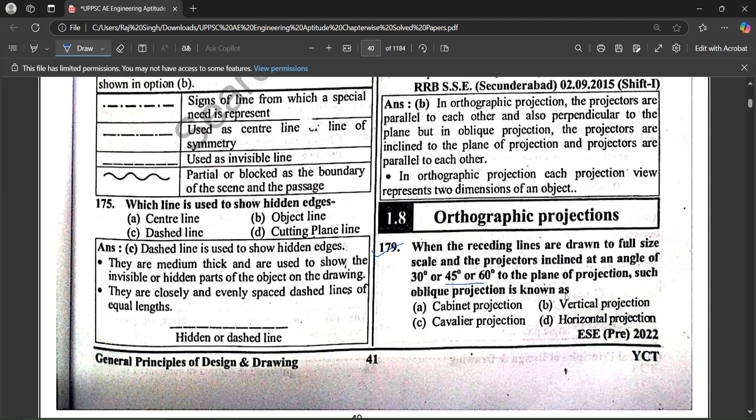There are three axes: vertical, horizontal, and oblique. The oblique axis, called receding axis, is drawn either at 30 degree or 45 degree or 60 degree. Types of oblique drawing: first is cavalier projection. When an oblique drawing is prepared to the exact dimension of an object, it is called cavalier projection. And in cabinet projection, to reduce distortion, the dimension of receding line of an object can be drawn at half scale.

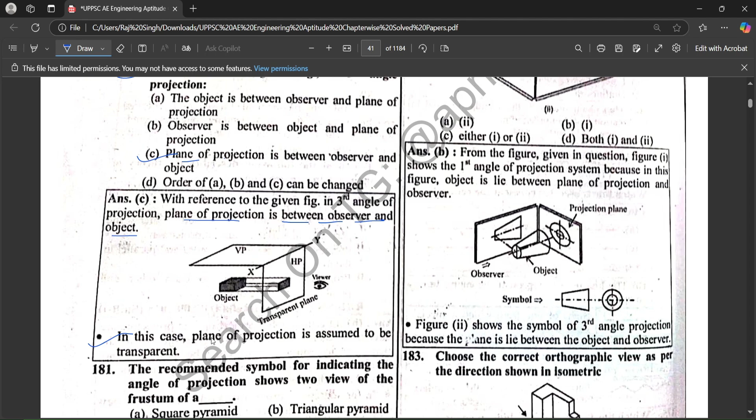Let's move ahead. With reference to figure in third angle projection, what happens? Plane of projection is between observer and object. With reference to the given figure in third angle of projection, plane of projection is between observer and object. In this case, plane of projection is assumed to be transparent.

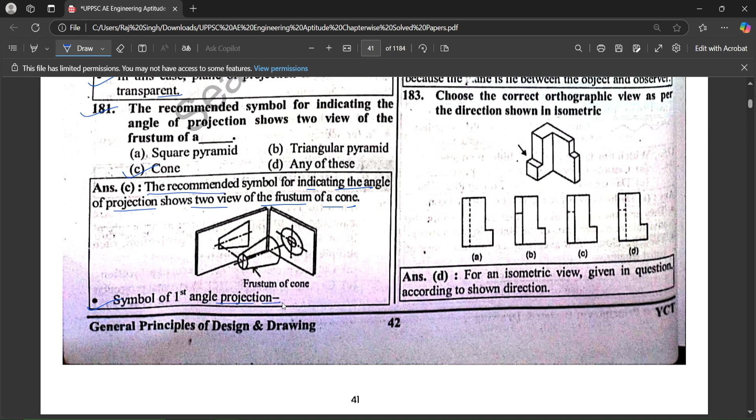Let's see the next question. The recommended symbol for indicating the angle of projection shows two views of the frustum of a what? Cone. Let's see the explanation. The recommended symbol for indicating the angle of projection shows two views of frustum of a cone. First symbol is one angle projection, first angle projection.

Let's see the next question. Figure 1 and 2 below show the method of obtaining first and third angle projection symbol. Which one shows the principle of first angle projection symbol? So what is this?

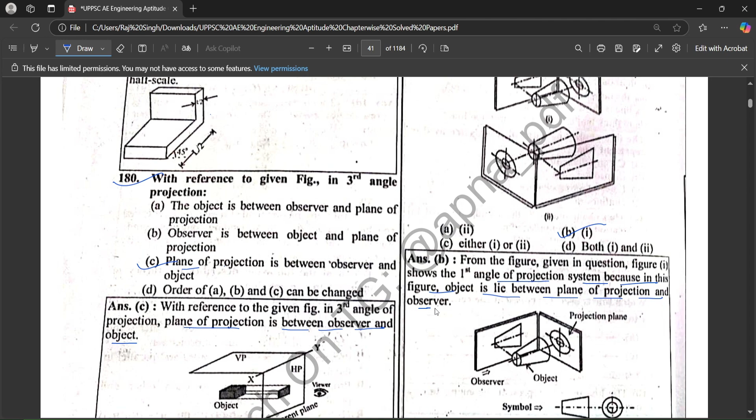First one shows our answer: first and third angle projection. From the figure given in question, figure 1 shows the first angle projection system because in this figure object lies between the plane of projection and the observer. But figure 2 shows the symbol of third angle projection because the plane lies between the object and the observer.

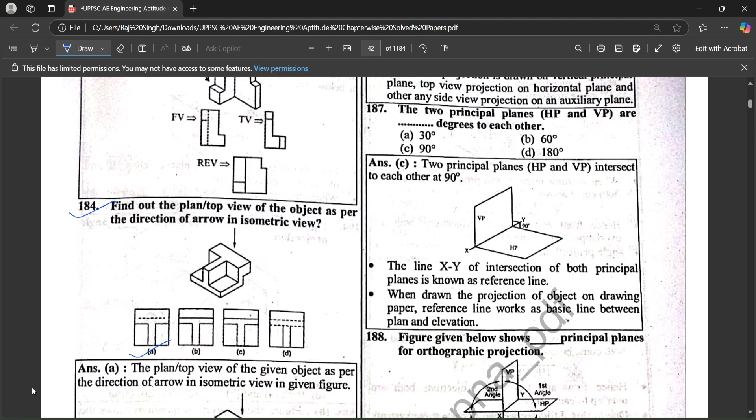Find out the plan top view of the object as per the direction of arrow shown in isometric view. So here we need to tell, is it clearly visible to you? Option A will be correct. The plan top view of the given object as per the direction of arrow in isometric view is given in the figure. In orthographic views there are plan, elevation and right end views.

That's how it was. Next question: an object is shown by more than one view in a drawing, it is called what? Orthographic projection. Let's see the explanation: an object shown by more than one view in a drawing is called orthographic projection. In this projection, projector or sight rays are parallel to each other and perpendicular to the plane.

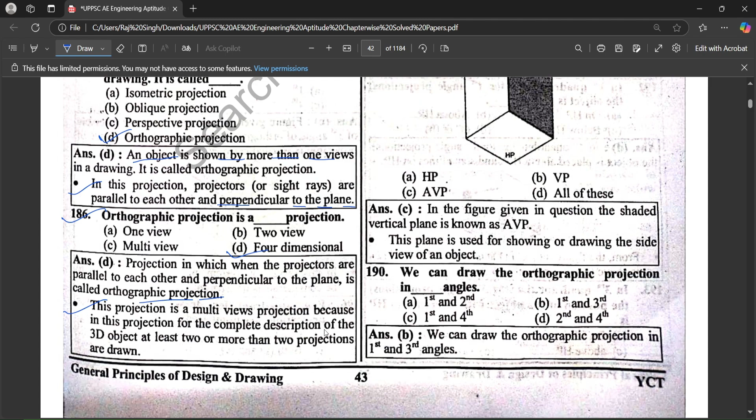Let's continue. Orthographic projection is a... is it a four dimensional projection? The projection in which the projectors are parallel to each other and perpendicular to the plane is called orthographic projection. This projection is a multi-view projection because for the complete description of the 3D object at least two or more than two projections are drawn.

Front view projection is drawn on vertical principal plane, top view projection on horizontal plane, and any other side view projection is on an auxiliary plane.

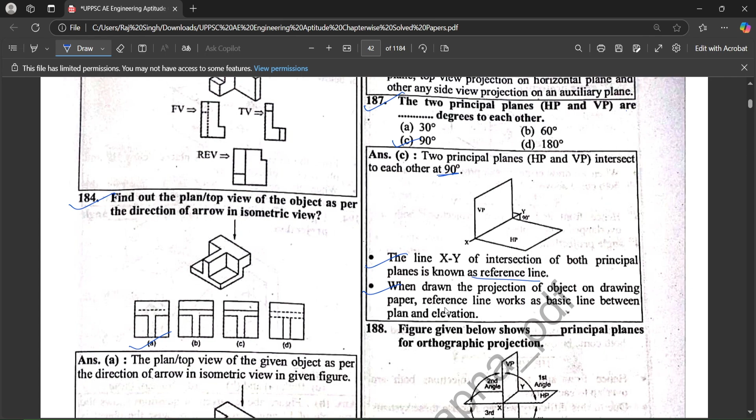Let's see the next question. The two principal planes HP and VP, horizontal plane and vertical plane, are at what degree to each other? You clearly know it's 90 degrees. The two principal planes, horizontal plane and vertical plane, intersect each other at 90 degrees. The line XY of intersection of both principal planes is known as reference line. When the projection of object is drawn on the drawing paper, the reference line works as the basic line between plan and elevation. The figure given below shows the principal planes for orthographic projection. So what is it?

The figure given in the question shows two principal planes for orthographic projection: horizontal plane and vertical plane. In the figure, the shaded vertical plane is shown as dash, which is the AVP. This plane is used for showing or drawing the side view of an object.

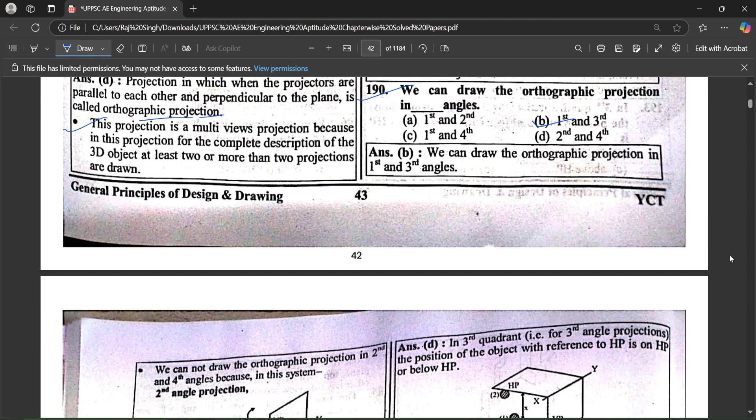We can draw the orthographic projection in first and third angle. We cannot draw the orthographic projection in second and fourth angle because in second angle projection, when we draw orthographic projection, horizontal plane and vertical plane both come above the XY line.

Hence front and top view projections both overlap with each other. In fourth angle projection, when we draw orthographic projection, horizontal plane and vertical plane both come below the XY line. Hence front and top view projection both overlap with each other. Due to this difficulty, we cannot use these systems in orthographic projection.

On auxiliary vertical plane, AVP, the view projected is side or end view. Side or end view is projected on the auxiliary vertical plane. Sometimes some features of an object lie on its left or right side.

Top and front view will not be sufficient to show these features in their true shape. In such case, the object is projected either on the left or right side plane. This side plane is also known as auxiliary plane.

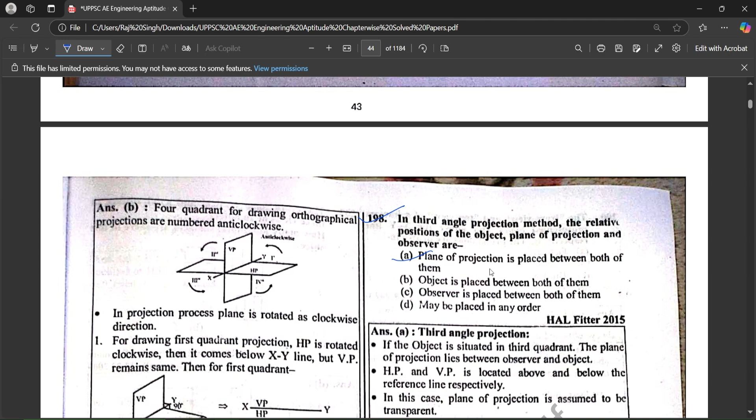In orthogonal projection, if an object is placed below horizontal plane and behind vertical plane, then at which angle will the object be located - hence it will be third angle. Let's look at the explanation.

What is first angle projection? Object is situated in front of vertical plane and above the horizontal plane.

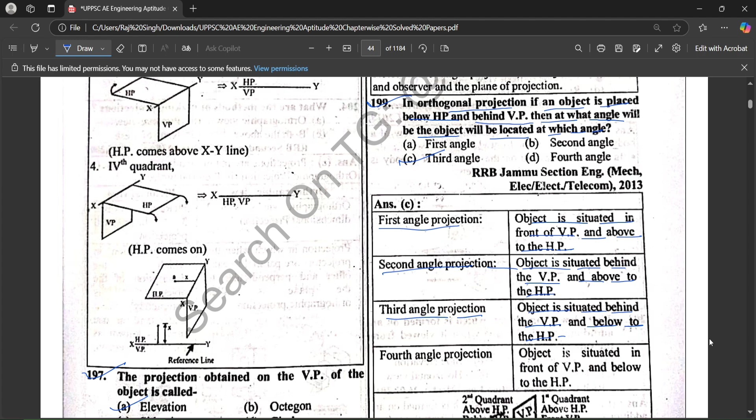Second angle projection: object is situated behind the vertical plane and above the horizontal plane. Third angle projection: object is situated behind the vertical plane and below the horizontal plane. Fourth angle projection: object is situated in front of vertical plane and below the horizontal plane.

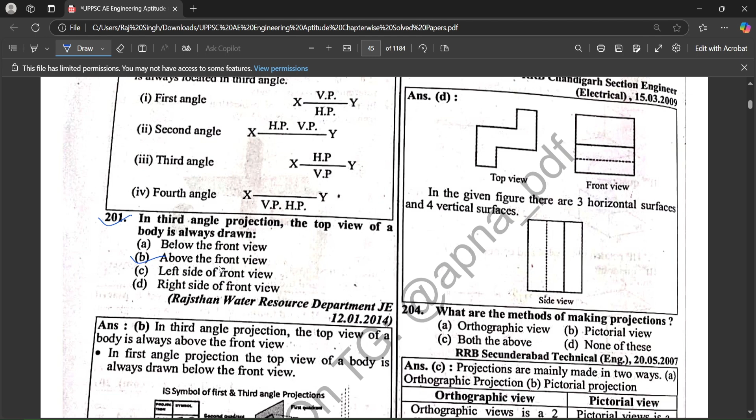That view of an object which is formed on an additional vertical plane when viewed from the side is called side elevation.

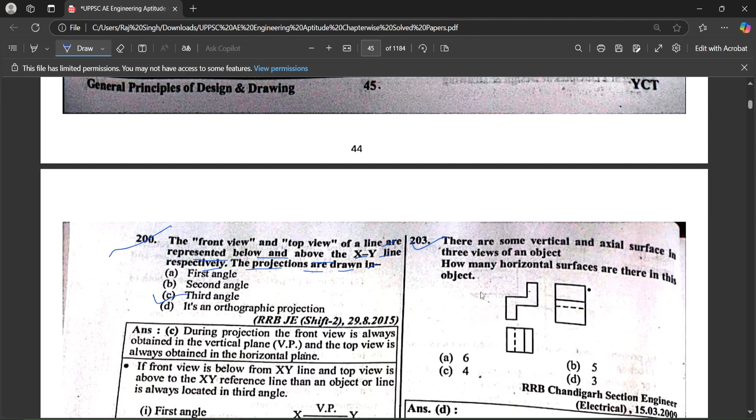There are some vertical and axial surfaces in three views of an object. How many horizontal surfaces are there in this object? It is three. What are the methods of making projection?

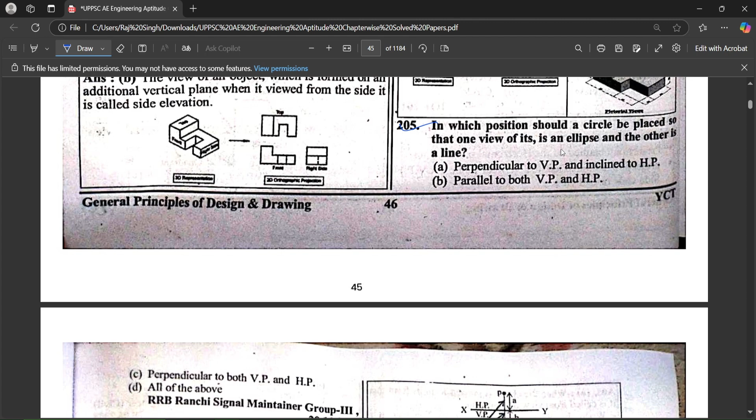The receding line of oblique projection is inclined at which angle? It is 45 degrees.

The line which connects the object and the projection is called a projector. The line joining the front and top view of a point is called a projector.

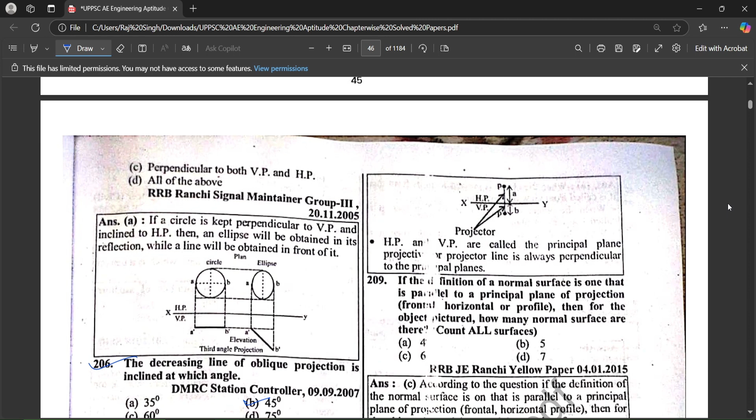If the definition of a normal surface is one that is parallel to a principal plane of projection - frontal, horizontal or profile - then for the object pictured, how many normal surfaces are there? Count all surfaces, which is approximately 6.

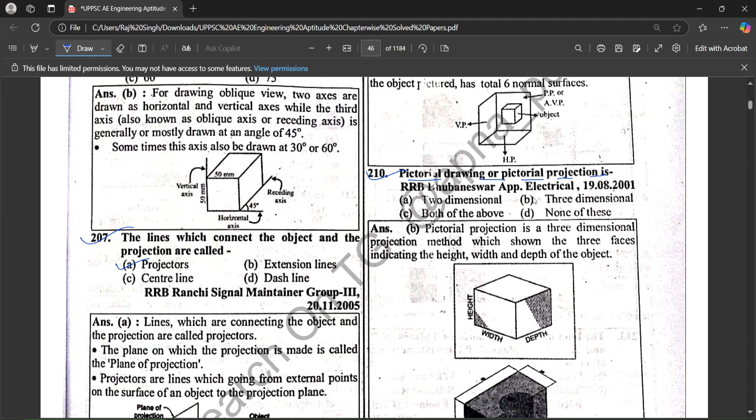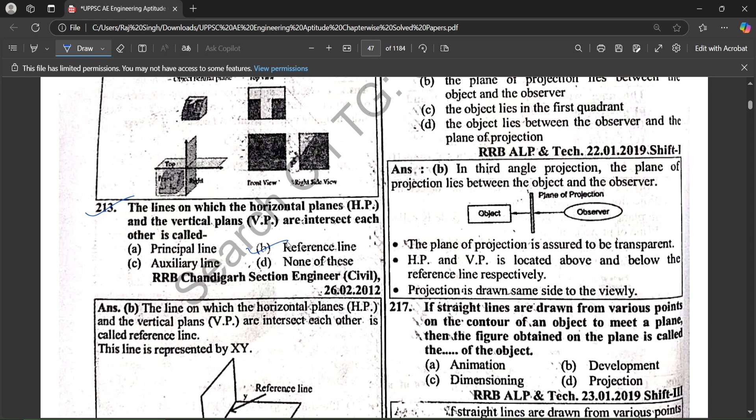The line on which the horizontal plane and the vertical plane intersect each other is called the reference line. In the human eye, the image of an object which forms on the retina...

In the human eye, the image of an object which forms on the retina is smaller and inverted than the real size of the object.

The human eye has an ocular lens which is a convex lens.

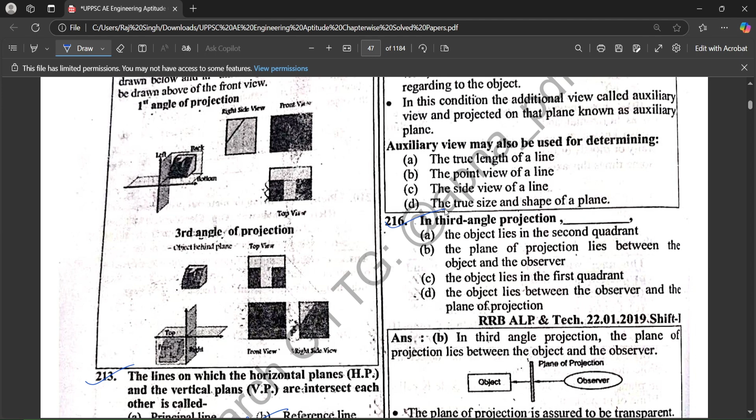What is the maximum number of auxiliary views of a given object? It is infinite. In third angle projection, the plane of projection lies between the object and the observer.

If straight lines are drawn from various points on the contour of an object to meet a plane, then the figure obtained on the plane is called the dash of the object.

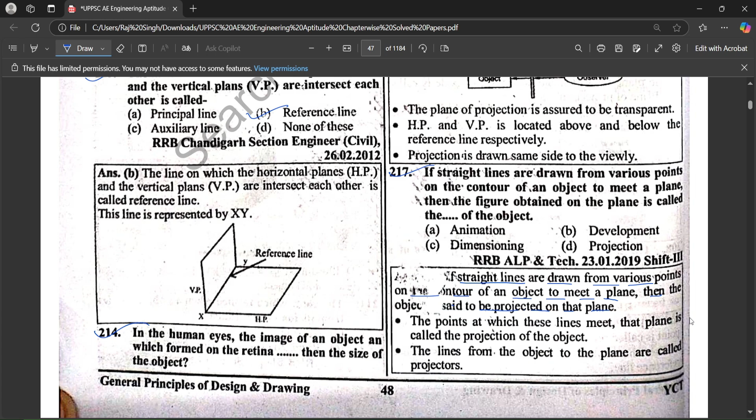Let's read the answer. Straight lines are drawn from the various points on the contour of an object to meet a plane - the object is then said to be projected on that plane. The point at which these lines meet the plane is called the projection of the object, which is option D. The lines which join the object to the plane are called projectors.

Moving ahead. In isometric drawing, vertical lines are drawn vertically, and horizontal lines in the width and depth planes are shown inclined to the horizontal at 30 degrees.

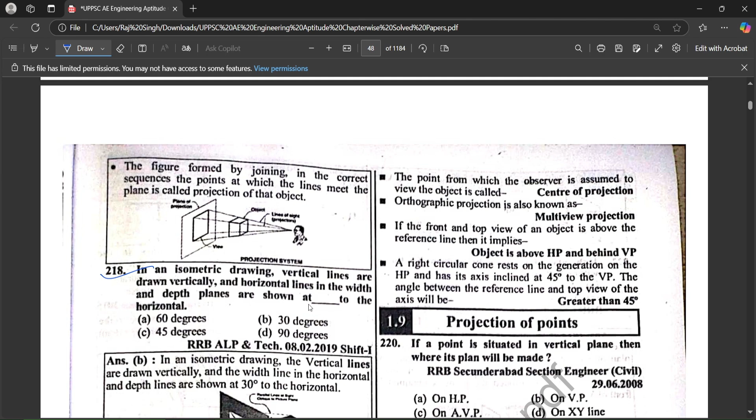A dash projection is an oblique projection in which the depth of the object is shown in full size, which is called cavalier projection. Let's look at important points from the exam perspective.

Number of principal views are 6. In orthographic projection, the angular position of the projection line and projection plane with respect to each other is perpendicular.

Technical drawing typically serves the purpose of visualization, communication, and documentation. In a perspective drawing, the object always touches the ground line.

The position of an object with respect to the picture plane, in order to obtain an enlarged perspective view, should be such that the object is in front of the picture plane.

Projection of a helix is sinusoidal. A circular shape appears in this fashion when viewed at an angle other than 90 degrees - it appears elliptical.

Principal views associated with orthographic projection are front view, top view, and side view. The front view of a cube, when it is resting on a horizontal plane on one of its faces and another face is parallel to the vertical plane, is a square.

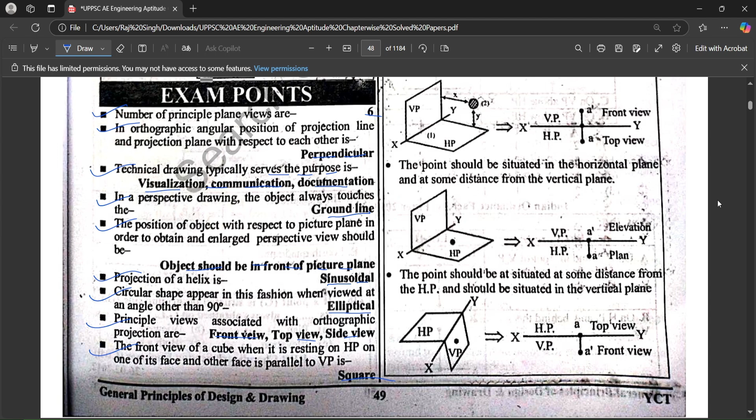The point from which the observer is assumed to view the object is called the center of projection. Orthographic projection is also known as multi-view projection.

If the front and top view of an object is above the reference line, then it implies the object is above the horizontal plane and behind the vertical plane.

A right circular cone rests on its generator on the horizontal plane and has its axis inclined at 45 degrees to the vertical plane. The angle between the reference line and the top view of the axis will be greater than 45 degrees.

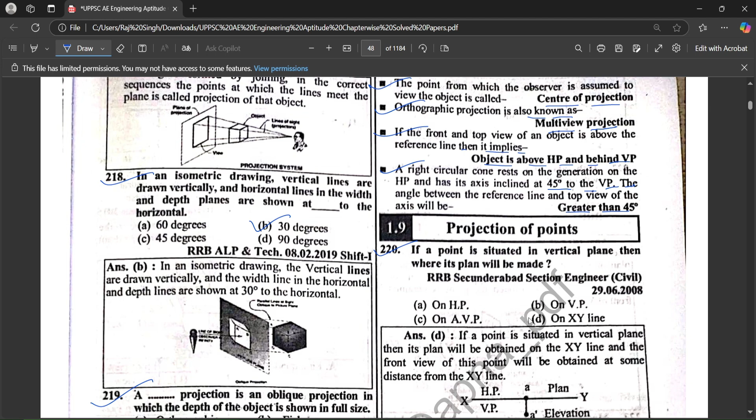Now let's look at projection of points. If a point is situated in the vertical plane, then its plan will be obtained on the xy line. The front view of this point will be obtained at some distance from the xy line.

What are the maximum possible positions of a point in any quadrant? It is C4. Let's move ahead.

If the plan of a point is below the xy line, it will be a vertical plane point and will be in front.

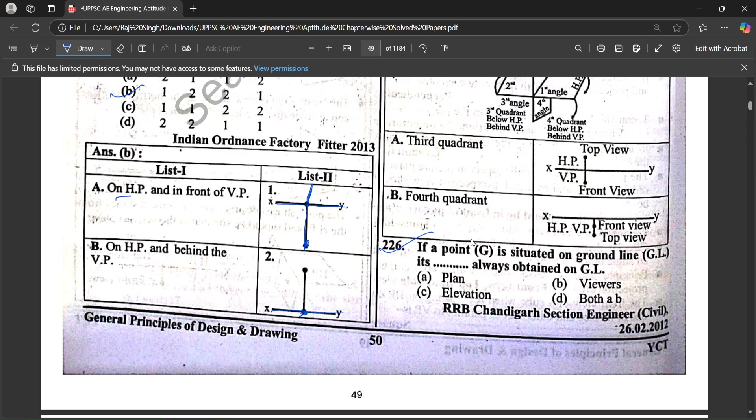If a point G is situated on ground line, its dash is always obtained in ground - what happens is elevation.

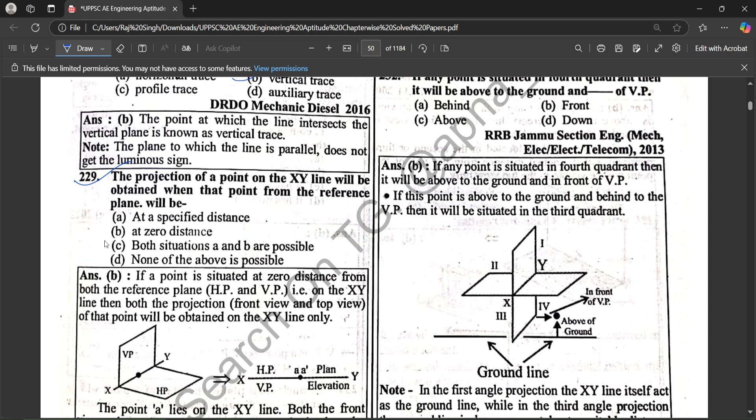The projection of a point on the xy line will be obtained when that point is at zero distance from the reference plane. If the point view of a point is on the xy line, then that point will be located in which plane.

The answer is horizontal plane.

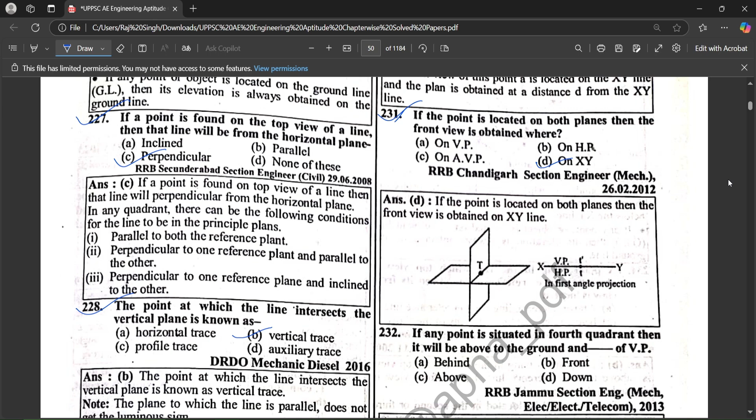If any point is situated in the fourth quadrant, then it will be above the ground and its dash of the vertical plane is in front of the vertical plane.

If any point is situated above the ground and behind the vertical plane, then the point will be situated in which quadrant - which is the third quadrant.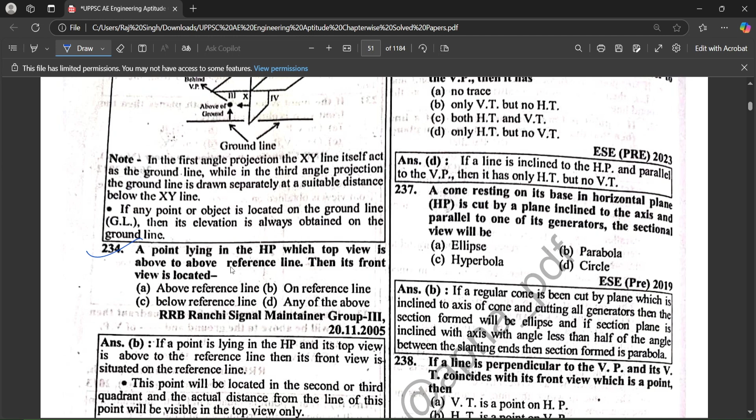A point lying in the horizontal plane whose top view is above the reference line, then its front view is located on the reference line.

The point at which a line intersects the horizontal plane, if extended, is known as the horizontal trace.

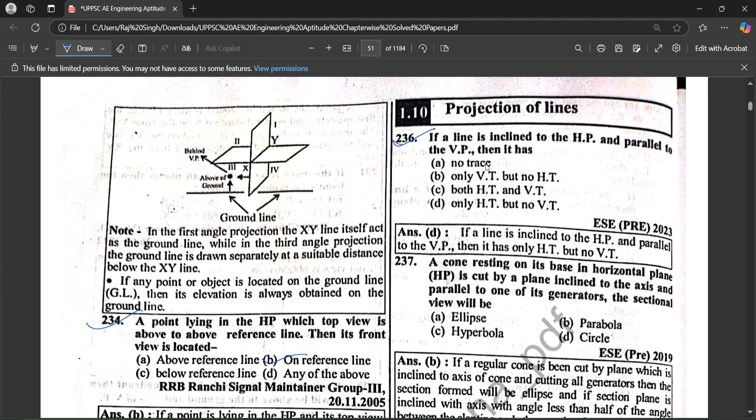Now we look at projection of a line. If a line is inclined to the horizontal plane and parallel to the vertical plane, then it has only a horizontal trace but no vertical trace.

A cone resting on its base in the horizontal plane is cut by a plane inclined to the axis and parallel to one of its generators. The sectional view will be a parabola.

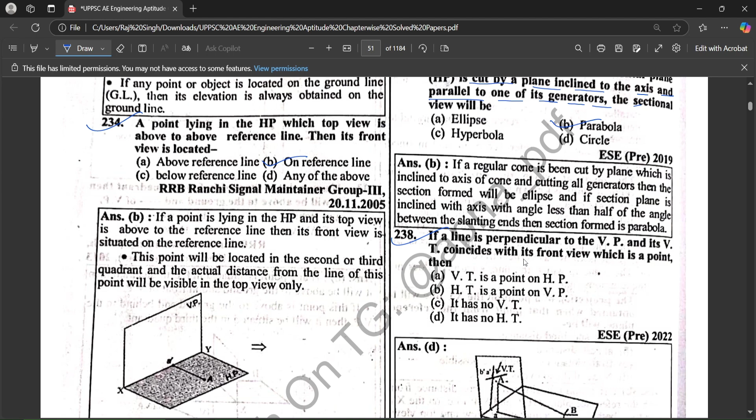If a line is perpendicular to the vertical plane, then its vertical trace coincides with its front view, which is a point, then it has no horizontal trace.

In the horizontal plane, the plan of a point will be at the same distance from the xy line, whatever distance this point is located from the vertical plane.

Let's look at the next question. The plane which is perpendicular to both the horizontal plane and vertical plane is called the profile plane.

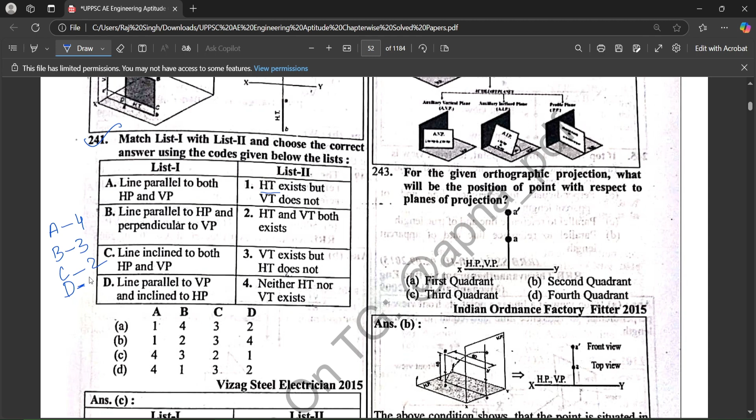Next we see - planes which are inclined to both the horizontal plane and the vertical plane are called oblique planes. Let's look at the next question.

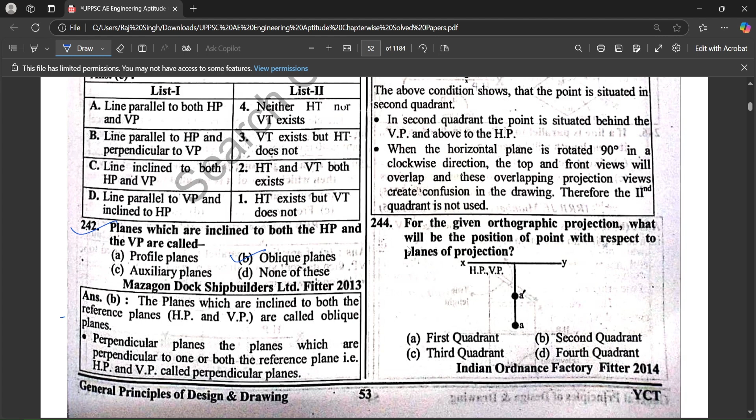For the given orthographic projection, what will be the position of the point with respect to the plane of projection - which is second quadrant? For the given orthographic projection, what will be the position of the point with respect to the plane of projection - which is fourth quadrant?

If the top view of a line is a point, its front view is perpendicular to the reference line and equal to its true length.

If a line is parallel to the horizontal plane and inclined to the vertical plane, its true length will be seen in the top view.

If a line is parallel to the vertical plane and inclined to the horizontal plane, then its view dash will be parallel to xy, which is the top view.

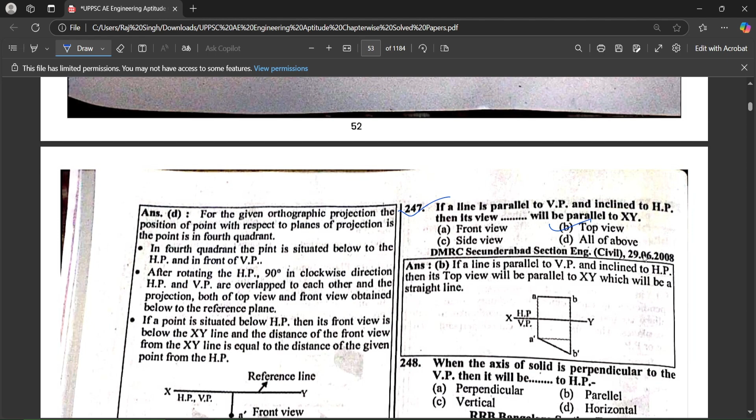When the axis of a solid is perpendicular to the vertical plane, then it will be parallel to the horizontal plane.

The elevation of a point is 40 mm above the reference line, and the plan is 50 mm below the reference line. That point will be 40 mm above the horizontal plane.

If a line is parallel to the horizontal plane and inclined to the vertical plane, then which view of it is parallel to the xy line? It is the front view.

A line inclined to the horizontal plane and parallel to the vertical plane has its true length represented in the elevation. If the vertical trace of a plane is a line parallel to the xy line, then the plane will be parallel to the horizontal plane.

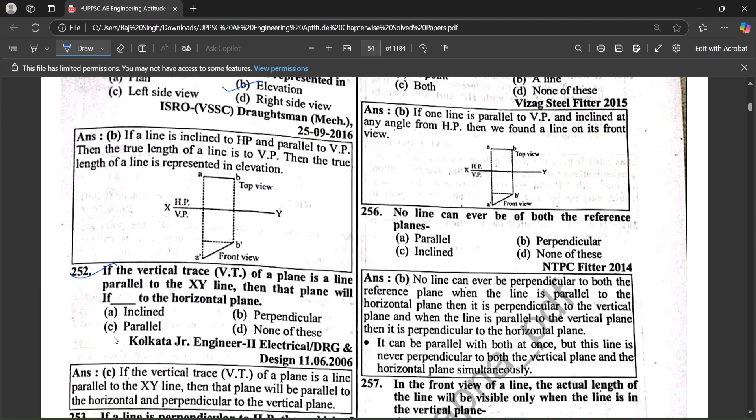If the line is perpendicular to the horizontal plane, then the view in which it is found as a point is the top view. If a line is perpendicular to the vertical plane, then the view in which it is perpendicular to xy is the top view.

A line which is parallel to the vertical plane and inclined at any angle to the horizontal plane - what is found in the front view?

And the option is a line.

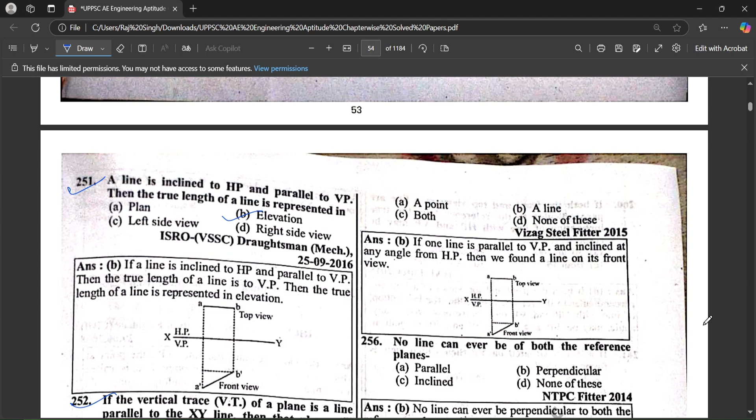No line can ever be perpendicular to both the reference planes.

In the front view of a line, the actual length of the line will be visible only when the line is parallel to the vertical plane.

If a line is parallel to the horizontal plane, its top view is a straight line.

If a line is inclined to the horizontal plane and parallel to the vertical plane, its top view about the xy line is parallel.

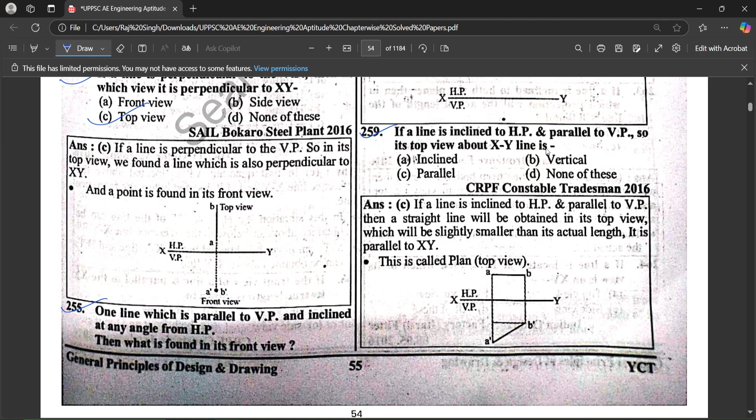If both the front and top views of a line are perpendicular to the reference line, the true inclinations of the line with the horizontal plane and vertical plane may be respectively any of these.

If a line is situated on the vertical plane, then the view found on xy is the top view. A line kept perpendicular to the vertical plane has its top view as a line.

If a line is inclined to both planes, then the projection in which the actual length of the line will be found is none of these.

If a line is located at the horizontal plane, then which of its view is on the xy plane? The answer is B, front view.

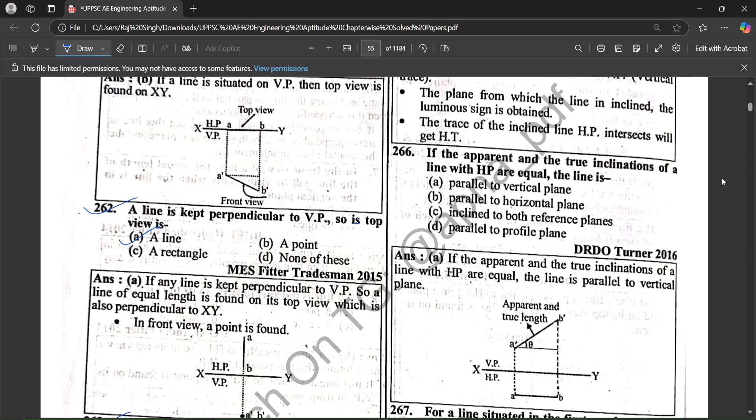Next question: the trace of an inclined line obtained from the horizontal plane is the horizontal trace. If the apparent and true inclinations of a line with the horizontal plane are equal, the line is parallel to the vertical plane.

For a line situated in the first quadrant, which of the following statements is not correct? The horizontal trace may lie above xy and the vertical trace below xy.

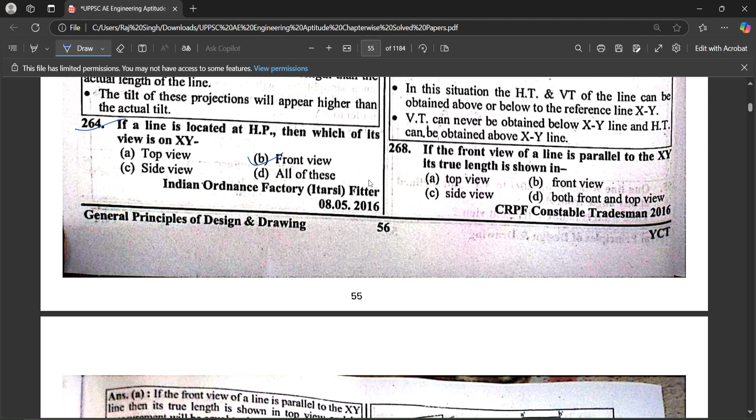If the front view of a line is parallel to xy, its true length is shown in the top view.

The front view and top view of a line both lie above the xy line, so the line is located in the second quadrant.

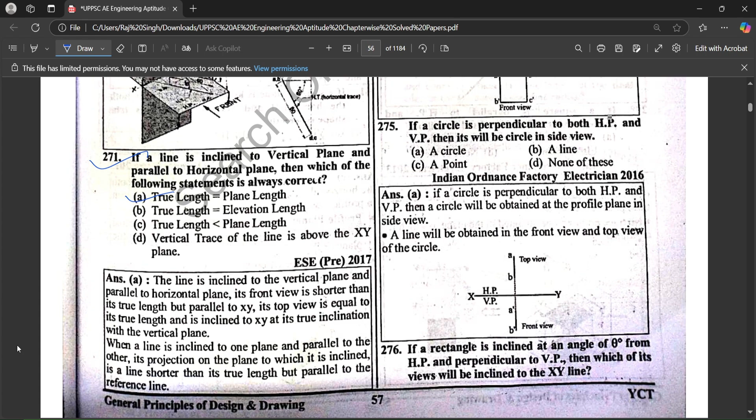If a plane is parallel to both the horizontal plane and vertical plane, then which trace will be obtained? None of these. If a rectangle is placed parallel to the vertical plane, its front view will be a rectangle.

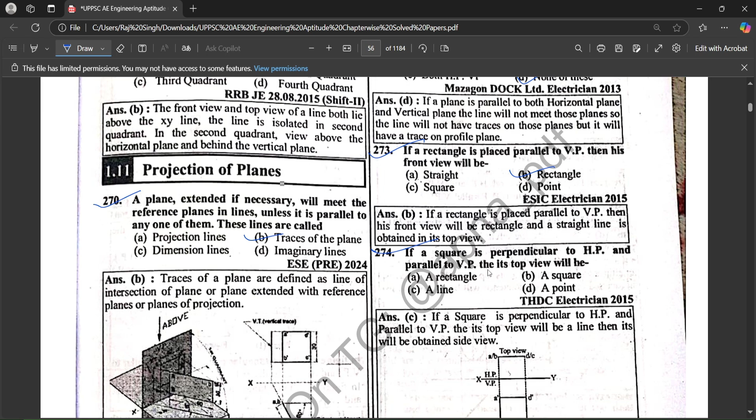If a square is perpendicular to the horizontal plane and parallel to the vertical plane, its top view will be a line. If a circle is perpendicular to both the horizontal plane and vertical plane, it will appear as a circle in the side view.

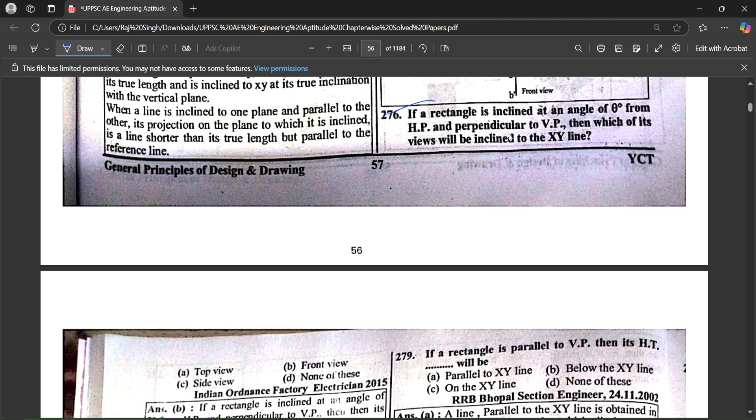If a rectangle is inclined at an angle theta from the horizontal plane and perpendicular to the vertical plane, then which of its views will be inclined to the xy line? The answer is the front view.

A circle is placed at which condition so that its top view is a square? The answer is none of these.

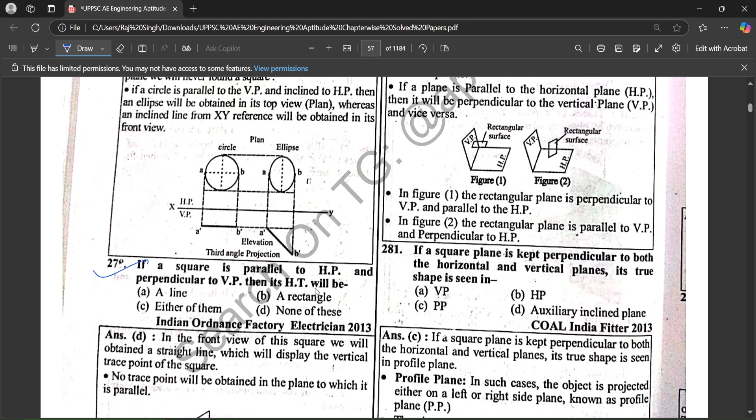If a square is parallel to the horizontal plane and perpendicular to the vertical plane, then its horizontal trace will be none of these. Okay, let's look at the next question.

If a rectangle is parallel to the vertical plane, then its horizontal trace will be parallel to the xy line. Any plane cannot be parallel to both reference planes simultaneously.

If a square plane is kept perpendicular to both the horizontal and vertical planes, its true shape is seen in the profile plane.

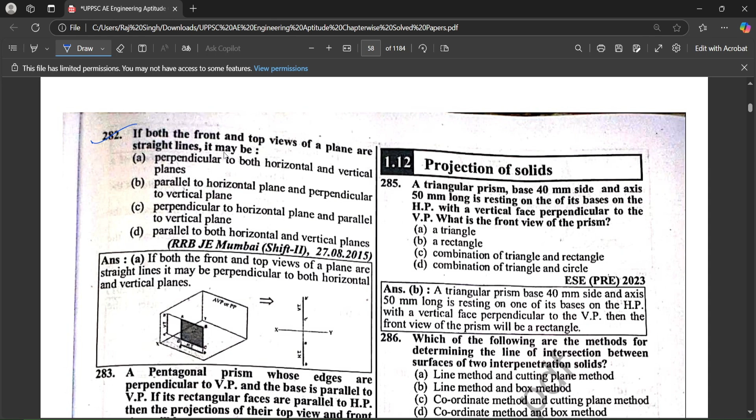If both the front view and top view of a plane are a straight line, it may be perpendicular to both horizontal and vertical planes.

A pentagonal prism whose edges are perpendicular to the vertical plane and the base is parallel to the vertical plane: if its rectangular faces are parallel to the horizontal plane, then the projection of their top view and front view will be as shown.

A square pyramid is resting on its base on the horizontal plane. One side of the base is inclined at 60 degrees to the vertical plane. The number of dotted lines that will appear in the front view is 1.

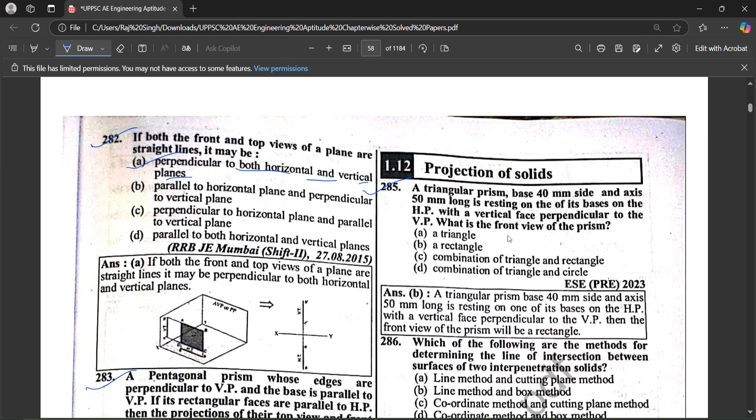Projection of solids: A triangular prism with base 40 mm side and axis 50 mm long is resting on its base on the horizontal plane with a vertical face perpendicular to the vertical plane. The front view of the prism is a rectangle.

The methods for determining the line of intersection between surfaces of two interpenetrating solids are the line method and the cutting plane method.

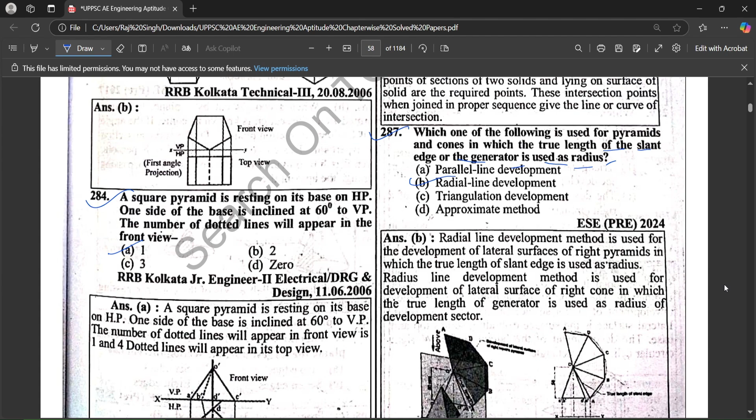The method used for pyramids and cones, in which the true length of the slant edge or generator is used as radius, is radial line development. If a square pyramid is freely suspended from one of the corners of its base, the imaginary line joining that corner with the center of gravity of the pyramid will be vertical.

The statement that is correct regarding development of lateral surfaces of solids: the development of the lateral surface of a right circular cylinder is a rectangle.

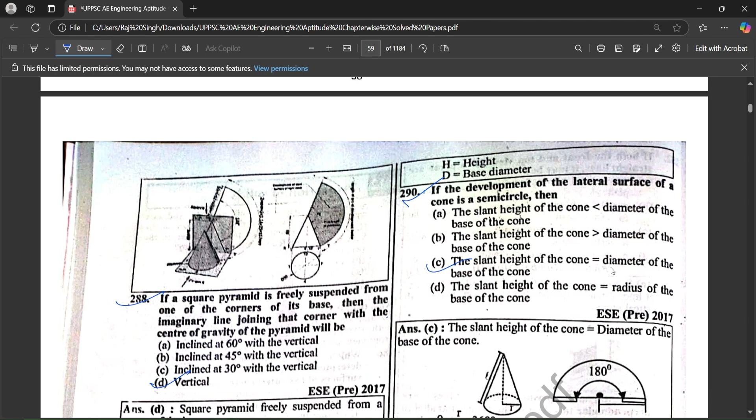If the development of the lateral surface of a cone is a semicircle, then the slant height of the cone is equal to the diameter of the base of the cone.

A cone is resting with its base on the horizontal plane. A section plane parallel to the vertical plane cuts the cone. The section plane is some distance away from the center and does not pass through the apex. The true shape of the section is a rectangular hyperbola.

A pentagonal prism is lying on the horizontal plane on one of its rectangular faces. When it is cut by a section plane, the largest possible section has 7 edges.

If a thread is wound around a cone starting from a point on the base and brought back to the same point, then the shortest possible length of the thread is equal to the largest chord of the development sector.

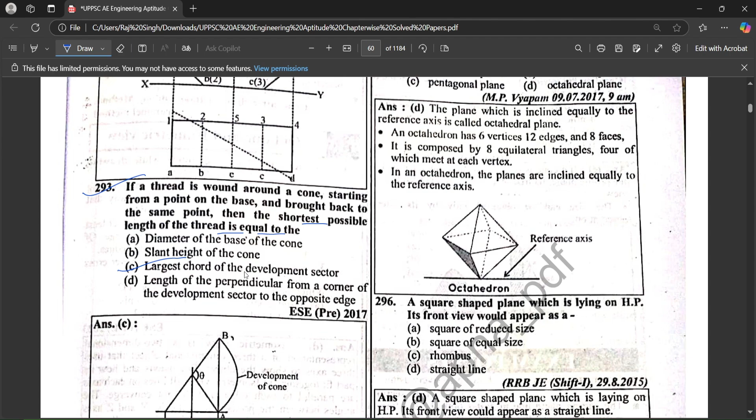The locus traced by a point moving along the pendulum from one point to another when the pendulum oscillates is a spiral.

The plane which is inclined equally to the reference axes is called an octahedral plane. A square-shaped plane lying on the horizontal plane, its front view could appear as a straight line.

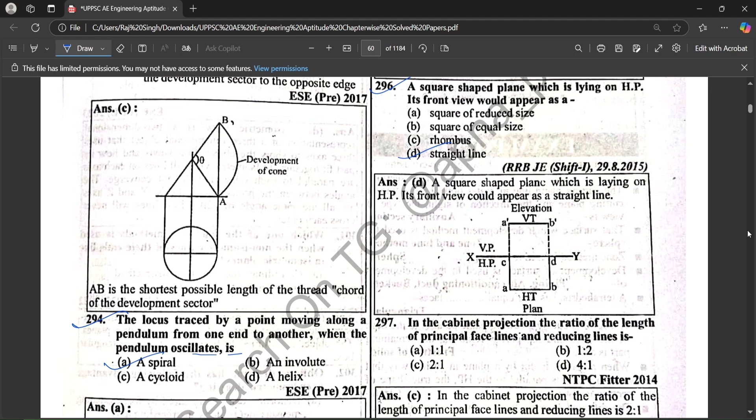In cabinet projection, the ratio of the length of the principal face lines and the reducing line is 2:1. In cavalier projection, the ratio between the length of the line of the principal face and the reducing line is 1:1.

A cone is cut by a section plane parallel to the profile plane. Its true shape of section is seen in the side view.

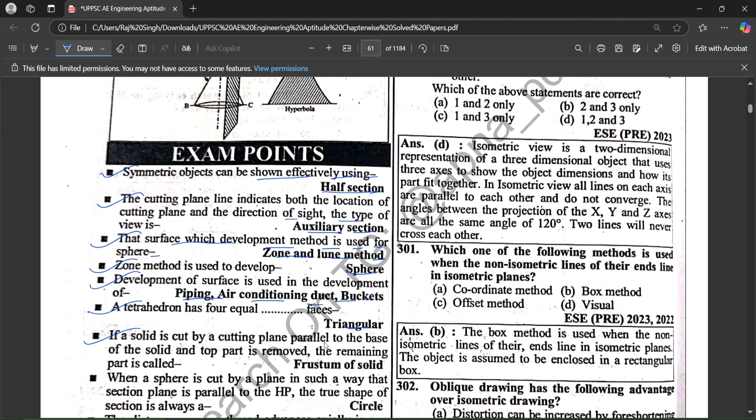A tetrahedron has four equal triangular faces. If a solid is cut by a cutting plane parallel to the base of the solid and the top part is removed, the remaining part is called the frustum of the solid.

When a sphere is cut by a plane parallel to the horizontal plane, the true shape of the section is always a circle. The distance a screw thread advances axially in 1 turn is called the lead.

Gear teeth formed on the flat surface are called rack. Some objects are made by intersection of solids because intersection of solids is a leak-proof joint.

When the cone is cut by a plane in such a way that the plane makes the same angle with the axis as to the generator, the curve is a parabola.

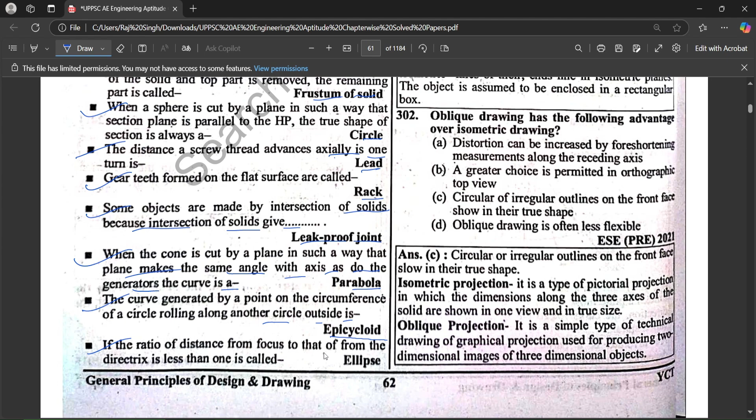The curve generated by a point on the circumference of a circle rolling along another circle outside is an epicycloid. If the ratio of distance from focus to that of from the directrix is less than one, it is called an ellipse.

When the cone is cut by a plane in such a way that the plane is perpendicular to the axis, the curve is a circle. A right circular cylinder is resting on a horizontal plane on its base and it is cut

by a section plane inclined to the horizontal plane, bisecting its axis. The true shape of the section is an ellipse.

The methods used to draw an ellipse are: concentric circle method, oblong method, and trammel method.

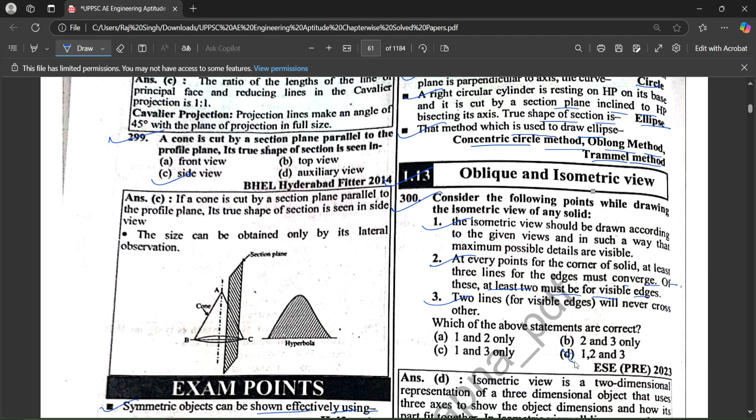Second, at every corner point of the solid, at least 3 lines for the edges must converge, and at least two must be visible edges. Two lines for a visible edge will never cross each other. So all the statements are correct.

Which method is used when a non-isometric line at their ends lies on an isometric plane? The box method. Oblique drawing has the following advantage over isometric drawing: circular or irregular outlines on the front face are shown in their true shape.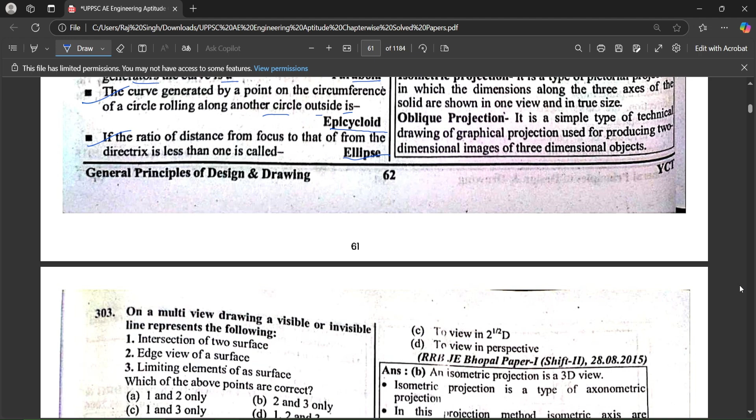Next question. On a multi-view drawing, a visible or invisible line represents the following: intersection of two surfaces - correct, edge view of a surface - correct, limiting element of a surface - correct. Hence statements 1, 2, 3 are correct.

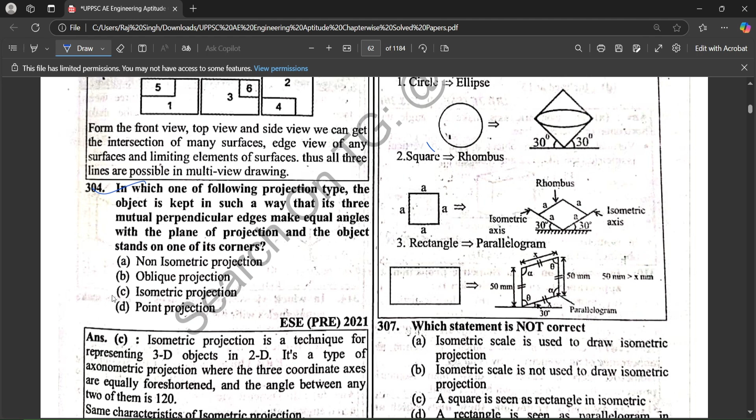In which projection type is the object kept in such a way that its three mutually perpendicular edges make equal angles with the plane of projection, and the object stands on one of its corners? This is isometric projection. An isometric projection is a 3D view.

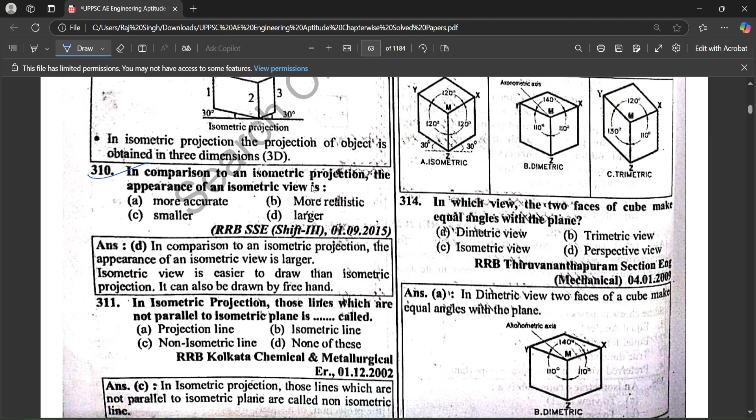The vertical edge of an object appears in its isometric view as vertical. In comparison to an isometric projection, the appearance of an isometric view is larger.

In isometric projection, those lines which are not parallel to the isometric plane are called non-isometric lines. Isometric view is a 3D view.

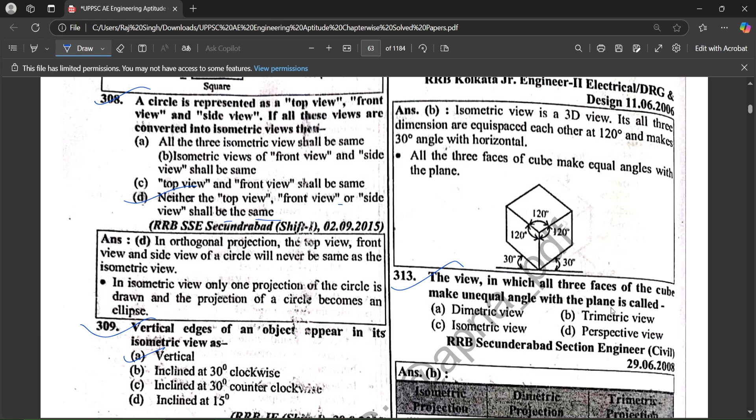The view in which all three faces of the cube make unequal angles with the plane is called trimetric view. In which view do the two faces of the cube make equal angles with the plane - this is dimetric view.

In which view do the three faces of the cube make equal angles with the plane - this is isometric view. In the isometric view of an object which has many vertical and horizontal surfaces...

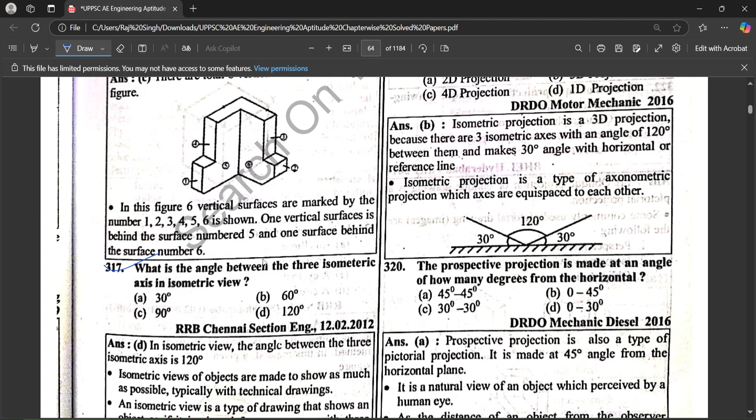What is the angle between the three isometric axes in isometric view? It is 120 degrees. The isometric plane which makes an angle of 30 degrees with the horizontal is called isometric projection.

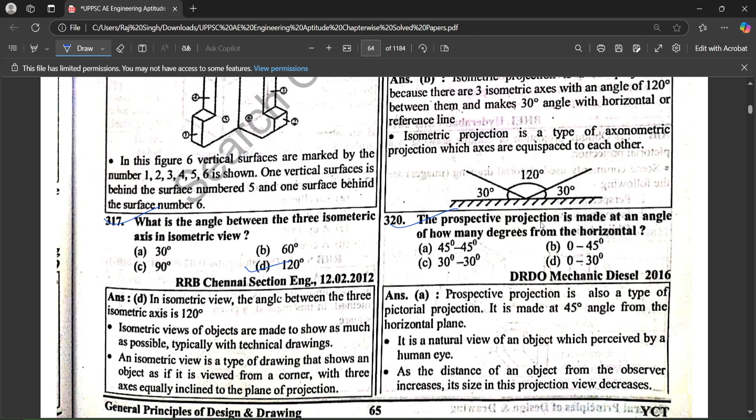Characteristics of isometric projection: it is a 3D projection. The perspective projection is made at an angle of how many degrees to the horizontal? It is 45 degrees.

What is the angle of the object in oblique projection - it can be any of these. What is oblique projection or oblique drawing - it is a pictorial projection.

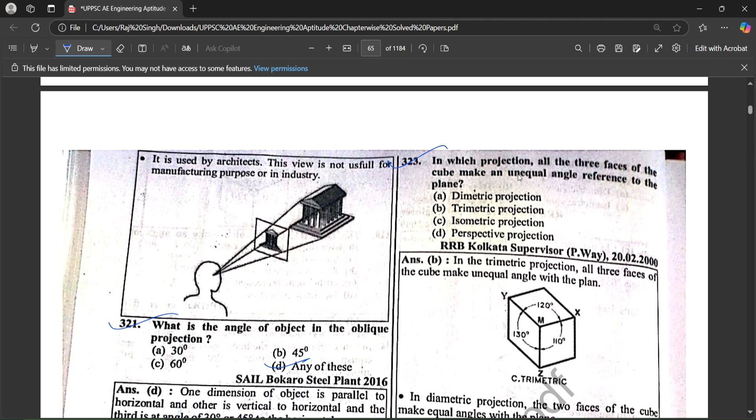In which projection do all three faces of the cube make an unequal angle with reference to the plane - this is trimetric projection.